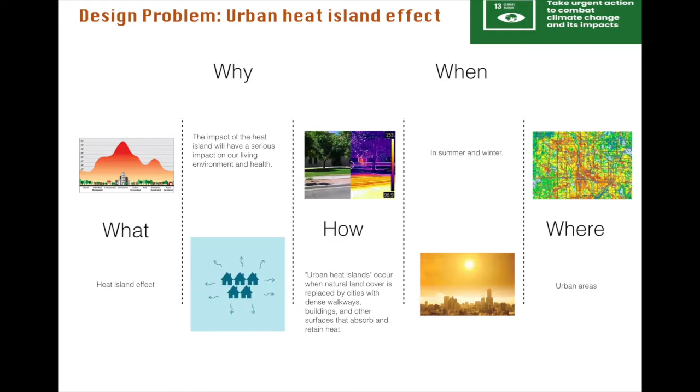My design proposition responds to SDG 13 climate action and the issue of urban heat island effects. The reason I chose this topic is because heat island effects will have a serious impact on our living environment and health, such as increased energy consumption, increased air pollution, greenhouse gas emission, damage to human health and comfort, and water quality. The location I choose is in Wuhan, China.

Under the trend of global warming, Wuhan's urban heat island effect has accelerated in recent years. The difference in surface temperature between the outskirts of the city and the city center can reach 20 degrees. Intense vehicle traffic in cities is an important factor leading to the urban heat island effects. A large amount of greenhouse gas is emitted into cities by fuel vehicles.

Increasing green bus travel can not only reduce greenhouse gas emission but also reduce energy consumption. However, according to statistics, only 30% of residents in Wuhan choose bus transport for travel.

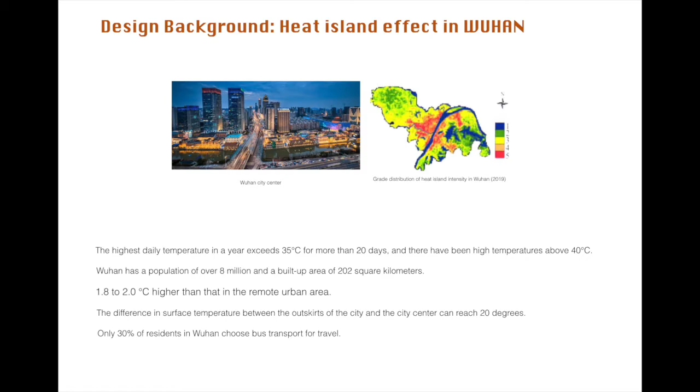My design aim is to reduce urban heat island effects, reduce greenhouse gas emission, and increase urban greening. My problem statement is: how can bus waiting areas reduce heat island effects by increasing the attractiveness of bus transport and by reducing greenhouse gas emission.

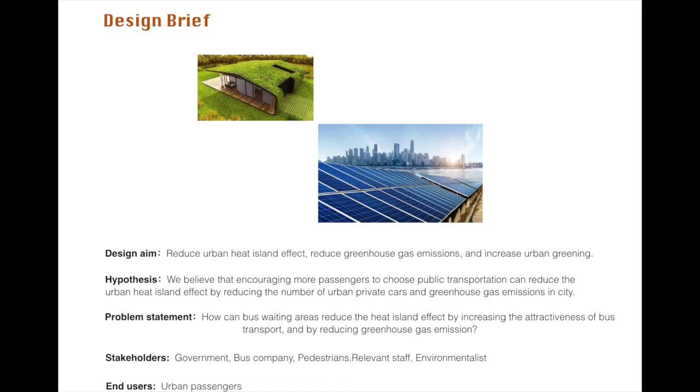The stakeholders are government, bus company, pedestrians, relevant staff, and environmentalists. The end user is urban passengers.

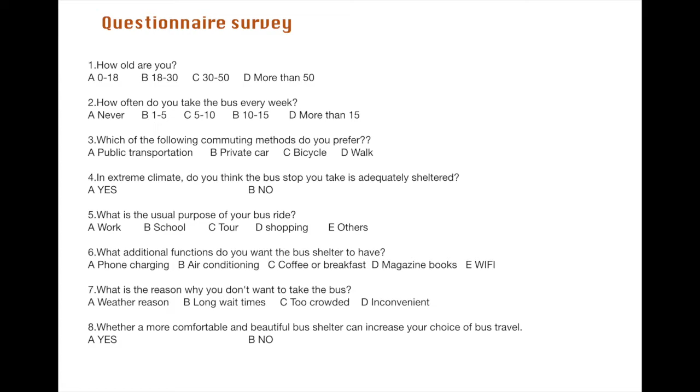In order to further understand current passengers' feelings about the bus travel experience, I made a questionnaire for bus passengers. The feedback through the questionnaire can indicate to a certain extent the passengers' experience and expectation of the bus shelter. In the question about the expectation of additional functions of the bus shelter, mobile phone charging and Wi-Fi function are the answers that count for more.

In terms of the waiting experience, most feedback, such as the feedback of question 7 and question 4, indicates that the shelter provided by the bus shelter in extreme weather is not enough. More participants in the questionnaire indicate that a more attractive bus shelter can increase their bus trips.

In addition, I recorded the performance of bus shelters in different locations and different weather. Although the generally adopted simple structure can achieve better space utilization, the actual shading effects and user experience are not good. Those seats exposed to the sun for a long time are so hot that passengers are very uncomfortable when sitting. Those too-narrow roofs cannot provide adequate shelter for many periods of time.

In rainy days, rainwater can cover all the ground under the shelter, which means that clothing and shoes of the user below the knees may get wet. Once under extreme weather conditions such as heavy rains or strong wind, the shading and protection effects of the bus shelter are very limited.

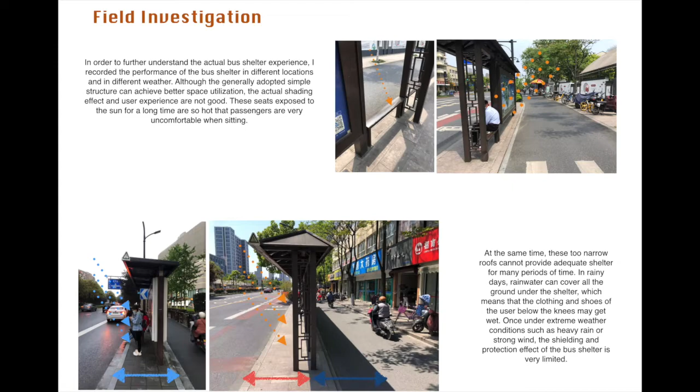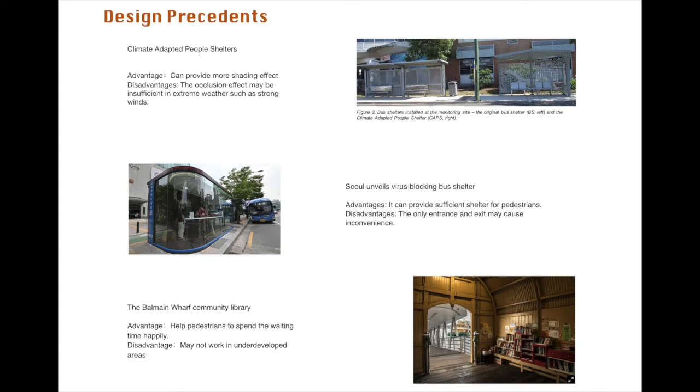Next is the personas I created from the user research and the design precedents, which are climate adapted people shelter in Sydney, Seoul unveils virus-blocking bus shelter, and the Balmain Wharf Community Library.

My design prototype 1 is a closed structure bus shelter with air conditioning equipment powered by solar energy to provide passengers with coldness in summer and warmth in winter. Green wall and solar energy can help improve urban greening and reduce energy consumption.

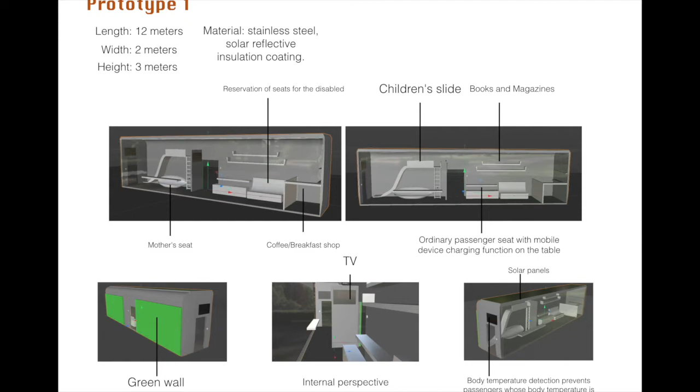Reserved seating areas are set for 3 groups of people: mothers with children, ordinary passengers, and the disabled. With TV, books, children's slide, Wi-Fi, coffee, and other entertainment facilities, the bus station becomes a rest place that can also be used for leisure and entertainment.

Prototype 2 is a fully enclosed bus shelter with an air conditioning system powered by solar energy that can provide passengers with more shelter and a more suitable temperature.

There is a hanging TV in the center which allows passengers to view bus arrival information, watch movies, and engage in interactive games with friends or strangers, such as word guessing games. The table with charging function allows passengers to charge their mobile devices. The item racks on both sides can be used for passengers to place items.

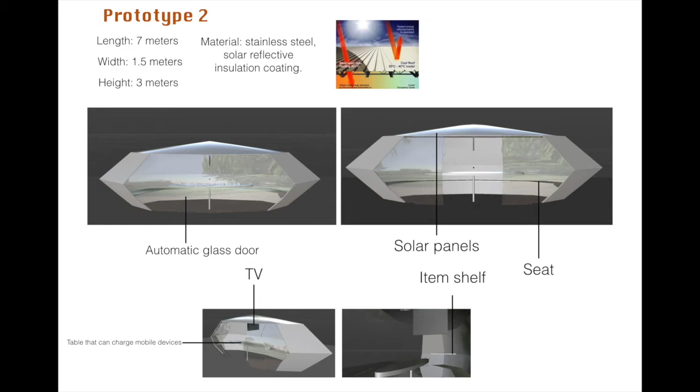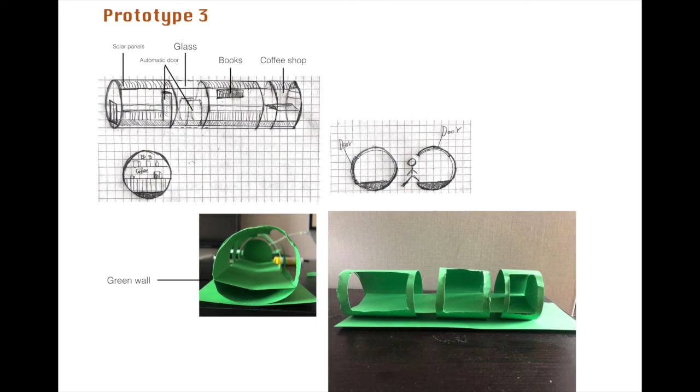Solar panels are also installed on the top to generate electricity and provide air conditioning service for passengers. I used software to simulate the sun trajectory and light time in Wuhan to check the shadow performance of the bus shelter. During most of the day, the simulation shows that the shadows at the bus shelter behaved well.